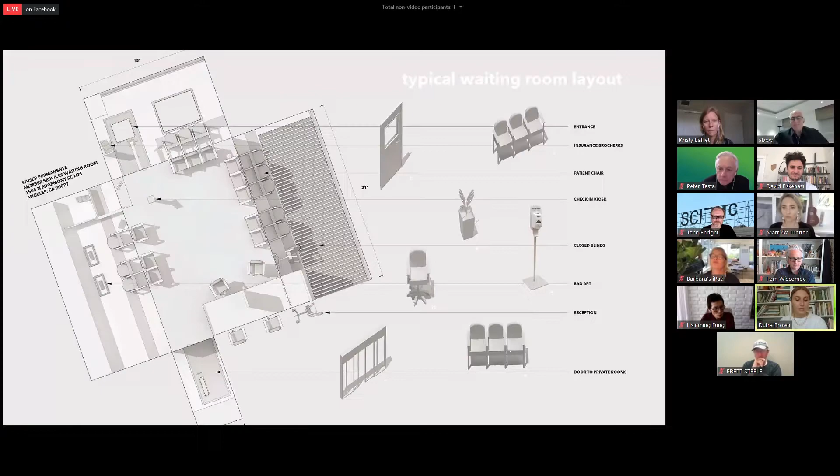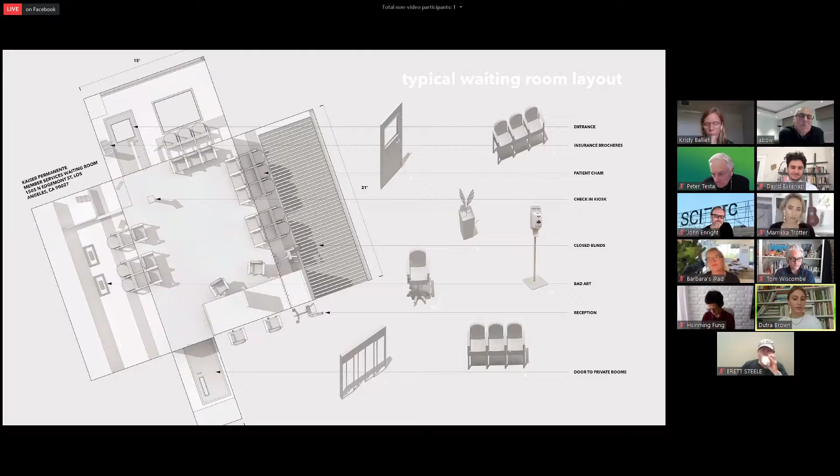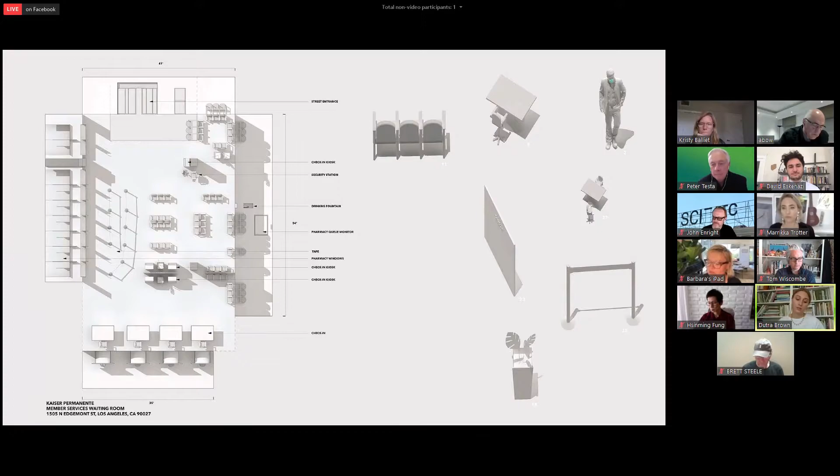The medical waiting room also marks a moment of internal transformation as one's identity moves from person to that of patient. It is for these heterotopic qualities of the waiting room that I associate it with a previous study of mine, the rug. Being a powerful object for effectively demarcating space, the rug is an architectural tool in generating real personal territory through purely representing it by framing its user both in form and in graphic.

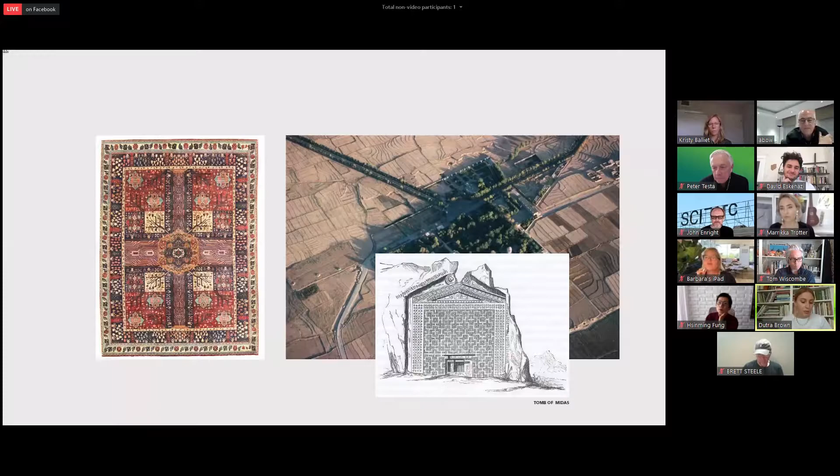The carpet also jumps scale, as the graphics and construction of early carpets were references to Persian gardens, otherwise known as paradise. This prompts the formal language of the project that began in the fall.

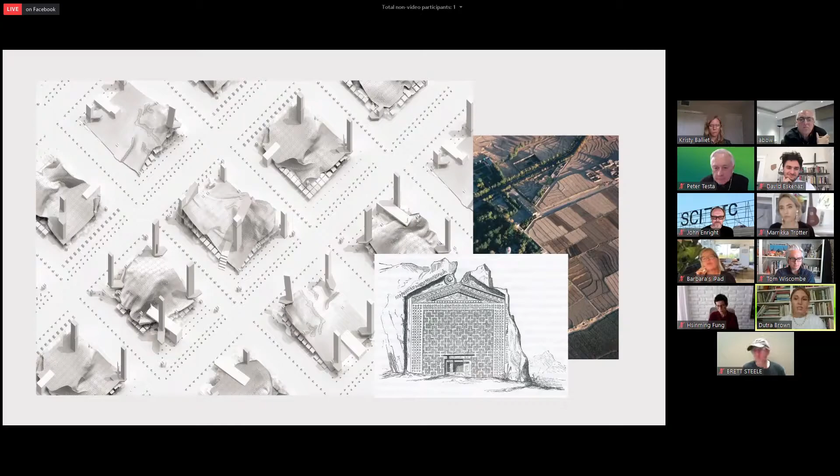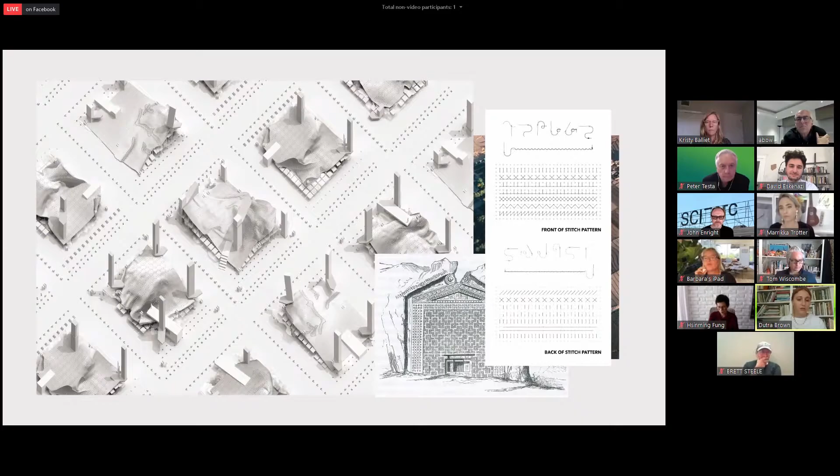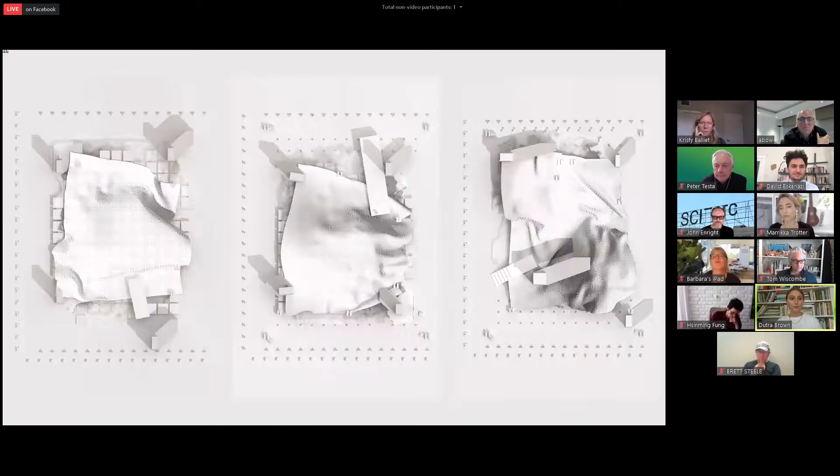I made a series of what I call blanketed landscape drawings. They are drawings that didn't respond to any particular program, but were interested in merging the large-scale language of landscape with the small-scale construction of the stitch. The craft of stitching is rethought through the architectural lens of drawing and becomes a tectonic linework with an inherent relationship between front and back. And these are some of the final images from that exercise.

So I see a useful connection for thinking of the space of the waiting room and the abstract space of the rug side by side. Since the waiting room strips its occupant of agency through a sort of singling out of the individual, the rug provides comfort to its user by referencing a larger community. The two together open an opportunity for healthcare design that privileges the collective over the individual.

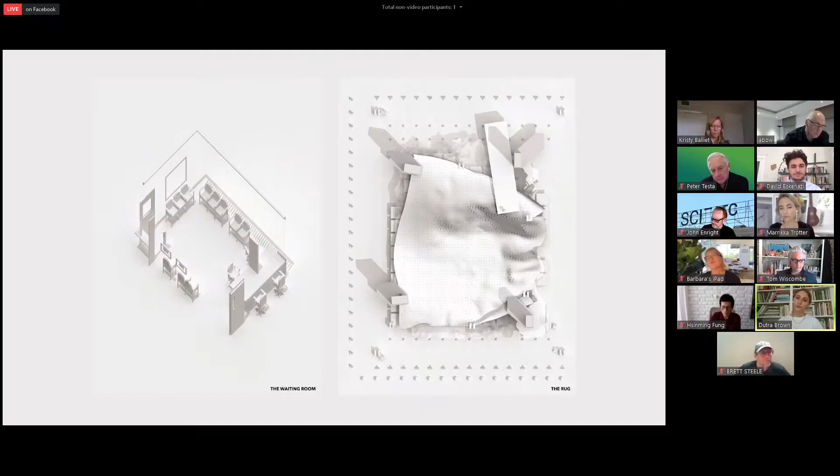This is in stark contrast to what we currently see as the trend in hospital design, which has been about an over-domestication of healthcare spaces. Purely interior design projects, they rely on a user-friendly, image-friendly language of tufted pastels and piped gold hardware. It is a language that is entirely familiar to us.

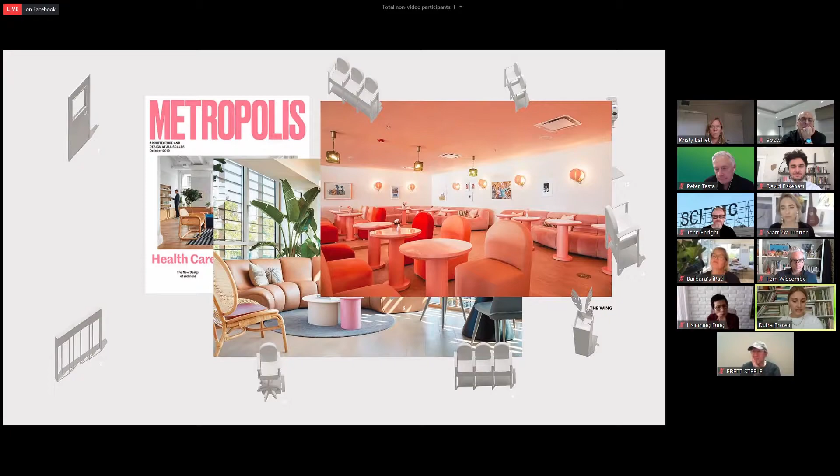We see it in office spaces such as The Wing, a women-only co-working space that exhibits its female-friendly design through plush fabrics and rounded corners. It is also the same language seen in new flagships of the makeup company Glossier. The problem with healthcare adopting the same architectural language of consumer brands is that it relates healthcare and good healthcare to taste.

It tells a false narrative that our fears and needs will not be recognized in an institutional setting. But healthcare is not a consumer good like mascara, but a civic right. And it should not go without mentioning that the language these healthcare clinics have adopted stems from consumer brands that target women, and women of a certain age, race, and affluence.

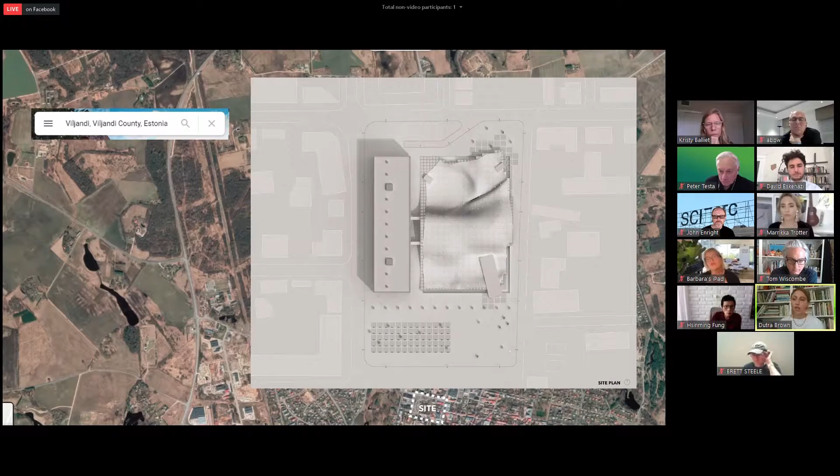This is of particular interest to this project since the Viljandi Health Center is one of three county hospitals in the area. Amongst other services, this new location has been designated for all of the obstetrics and gynecology departments in the area, and therefore the majority of patients at this hospital will be women.

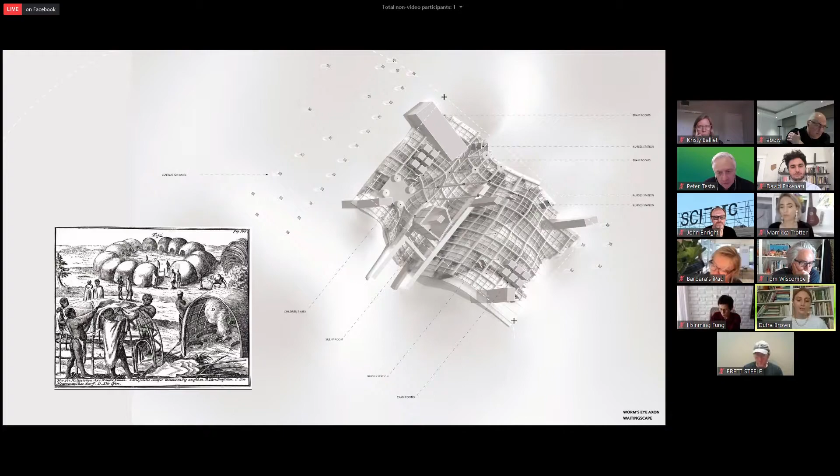While the carpeted landscape provides a formal language for this project, it also anchors it to a particular history in architecture. The historical implications of the carpet, as described by Aaron Betsky in his book Building Sex, is one that ties the first moments of architecture to the labor of women in early nomadic society. Women did the weaving of the carpets, women possessed the knowledge of tent construction, and these tents were constructed and organized around a fire, which women were in charge of tending to. It was an act of placemaking centered around and for community.

So the form of this building derives from thinking of the waiting room as one large interior landscape. If traditionally we see a series of small waiting rooms sprinkled throughout the hospital divided by department, this hospital aggregates those waiting spaces into one.

Certain outpatient services take place within this waiting-scape and are dispersed like follies.

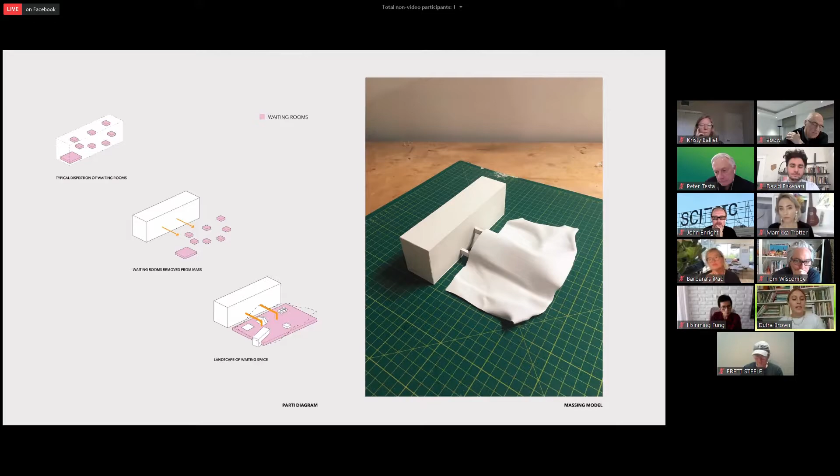The waiting landscape is signaled through its roof, which touches down on the site at two of its corners, becoming a new ground. It is a public terrain and sloping park, but also a functional amenity to the hospital, so that patients in rehabilitation have access to an outdoor space for exercise and physical therapy.

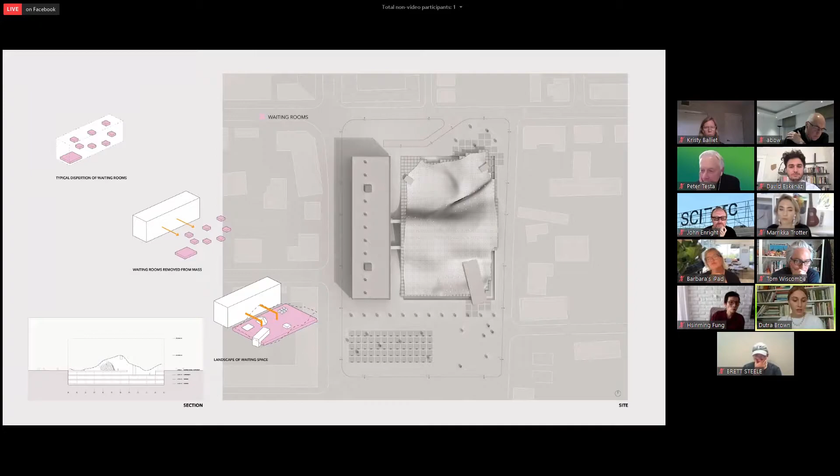The material of that top surface supports this by being slightly soft and spongy for patients. It's a synthetic rubber with no added pigment, similar to a clear silicone, sprayed on top of a panelized perforated metal surface, which allows light to filter into the waiting space below.

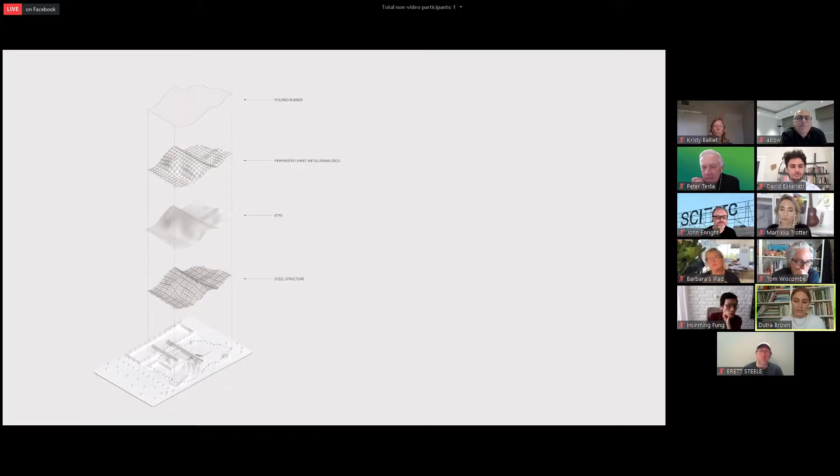Just to ground this in reality, I'm thinking of the construction technique used on rubber mulch playgrounds. While this hospital has a different color palette, I'm using this as an example for technique. I get excited about this because that spray-on rubber as a final layer gives a very clean, monolithic look to the surface from an aerial view, which has been a way I've been working and looking at this project.

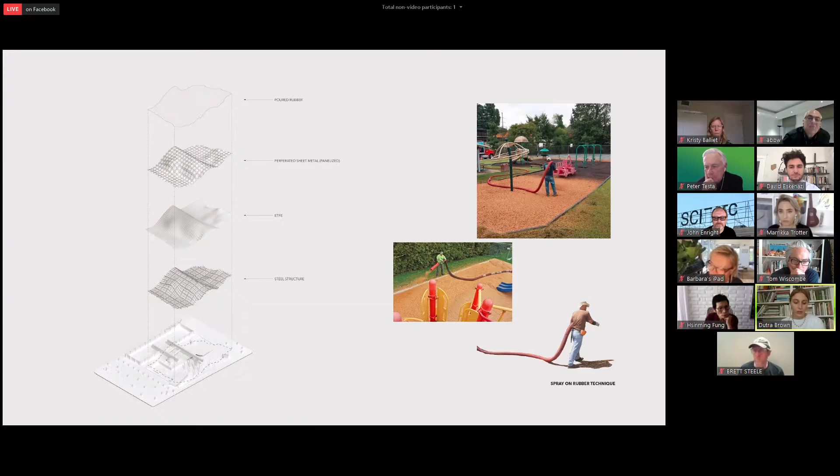The ward block of the hospital, where all the beds are for people staying long-term, is intentionally placed on the east face of the taller muted building next to this waiting-scape, so that all the rooms can look out on top of the landscape.

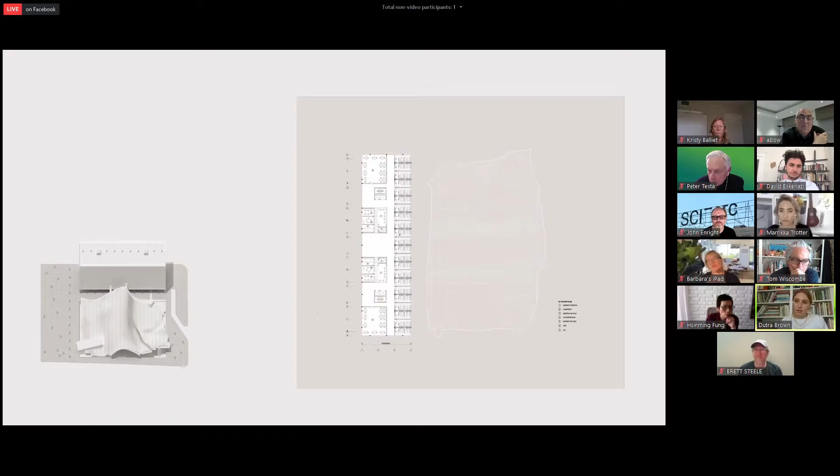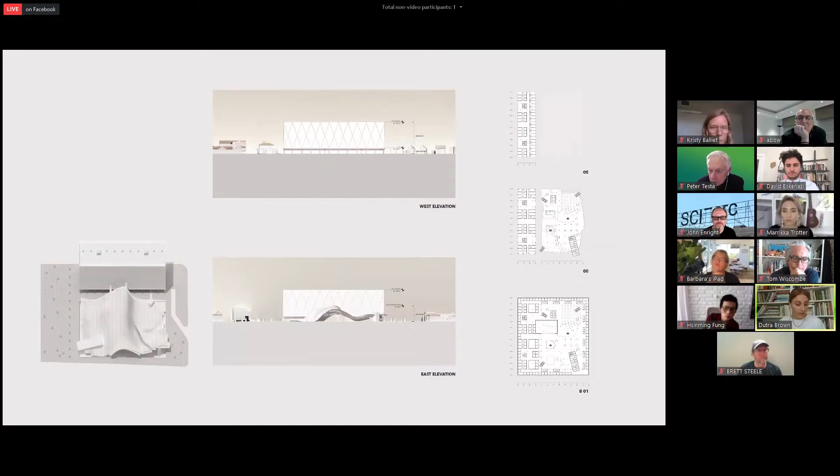That muted building is meant to support its formal counterpart in every way, both visually as a kind of blank backdrop, an idea carried through elevation and into plan. It also supports the roof literally, as two arms lift the roof in two locations.

The synthetic material language mixed with its organic form creates a new natural, one that speaks to the program of the 21st century hospital.

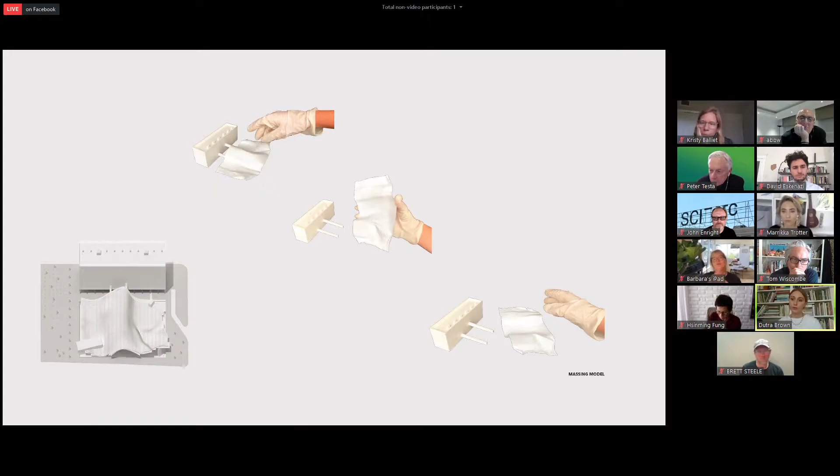Underneath this undulating roof is an interior landscape of waiting space. Outpatient services like eye exams, yearly checkups, and vitals take place within this waiting-scape, placed almost like follies, keeping in mind their adjacencies to one another in order to maintain efficiency.

They break up the otherwise constant arrangement of seating, which is aligned to an overscaled tile pattern that starts to echo the carpet's concept of framing and the notion of personal territory that I'm pushing forward.

In this plan you can see some of those follies I'm talking about. There is a range of types of exam rooms, from more solid containers of very private rooms, to lighter clusters, to even some rooms that remain open for more routine events like the checking of vitals.

The idea is similar to hiding in plain sight: the more activity that happens in this space, the more privacy for the patient.

There are some other services within this waiting-scape, like a pharmacy. This is what I call the reflection chamber, a quiet space for meditation or prayer, similar to how you find chapels near the lobby of hospitals. That's what this rock is — you can enter it, and it's a big cavernous space.

Some of this language spills out onto the site. This is the outdoor seating area populated with ventilation units that are brushed off the top surface of the roof and incorporated into the landscape.

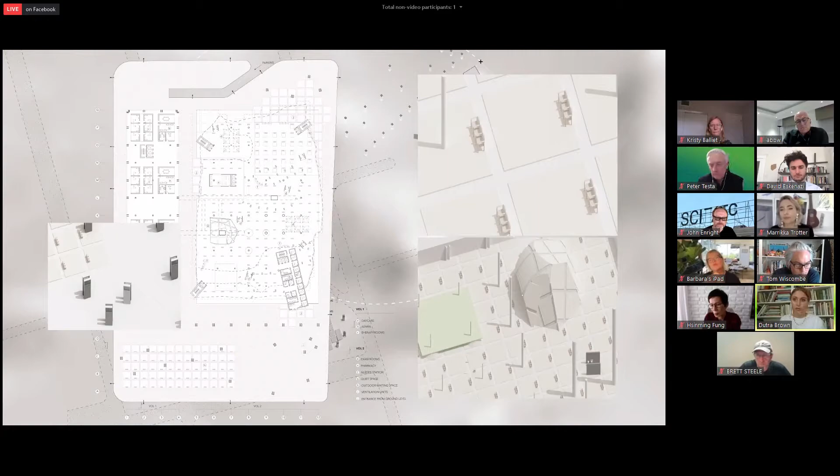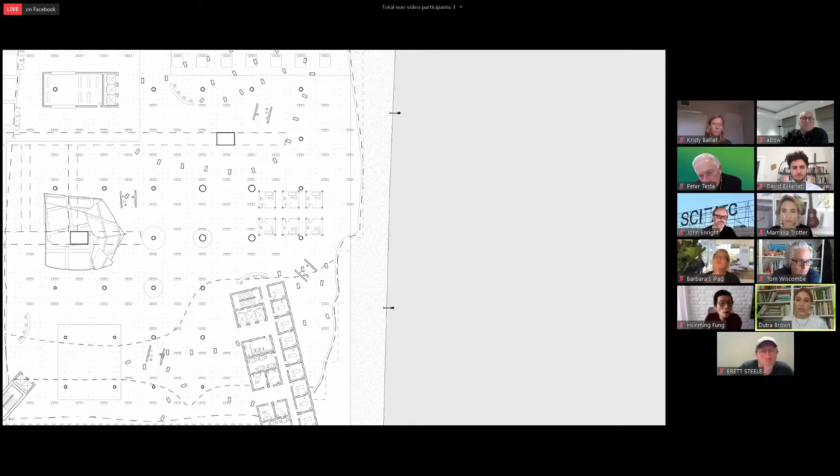Through the arrangement of these services, coupled with the variety of ceiling heights from the undulating roof, a gradient of waiting space is provided. The material palette is a remix of materials known to the hospital: plastics, white tile, the cloth-like draping of the roof, little mounds of rubber that hit at the end of these columns to be lounged on.

And of course, the quality of light coming through that surface is very important. You can see in the distance those two arms extending out from the mid-rise building, so that patients in long-term recovery can do their laps and be an active part of that space by looking down into it below.

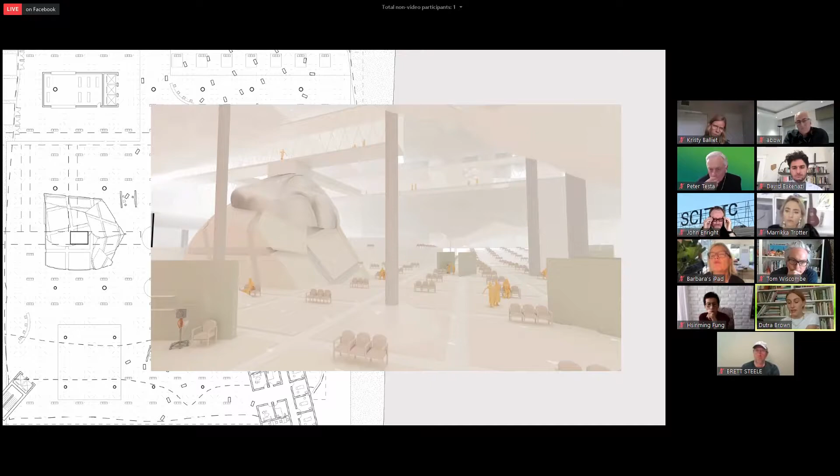Through the design of this imagined waiting-scape, this project hopes to reclaim the hospital typology as an architectural project, one that belongs to public urban infrastructure. Thank you.

Thank you, Dutra. That was beautiful. Well, I'll kick it off. Dutra, amazing presentation. First of all, absolutely amazing. I'm a little bit familiar with some of your work from last semester. You did a wonderful overlap between thesis research and other projects you've done to carry it through. Just really, really amazing.

I wanted to ask one question, and I love your critique of what you called the over domestication of healthcare, which I thought was really interesting. You also called waiting rooms gray at one point. And then when we finally get us inside your world, what about the actual materiality that we're looking at? Because you're dealing with, in a beautiful way, a level of abstraction where it becomes very spatial, and I understand that. But I wanted you to fill in a little bit about the aspects of color or materiality.

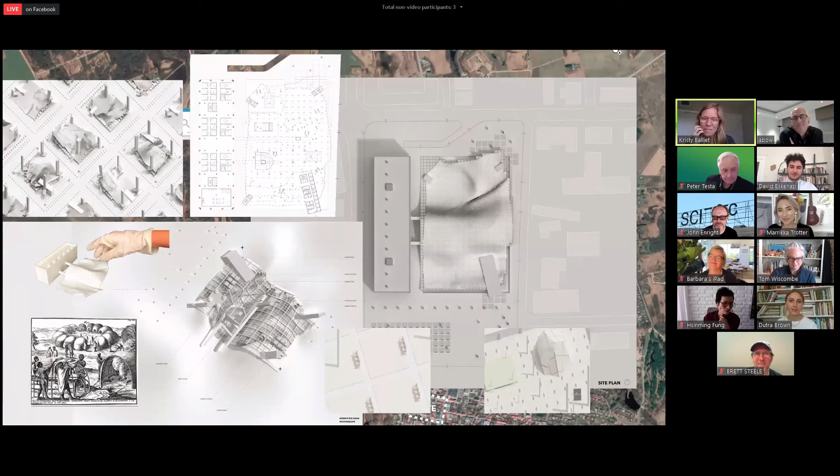Thank you very much, and thank you to Kristy for the semester. David and John, you're in the room too, so all my instructors - it's been a good 5 years. Yeah, thank you so much. Congratulations, so much. Thanks, Dutra, it was really awesome. I can't wait to see you again soon in person. Congrats. Dutra, I just want to say too, what an intellectual leader you've been, and it's so great how many students look up to you and watch you - we're really going to miss you at the school. Thank you. Thanks.